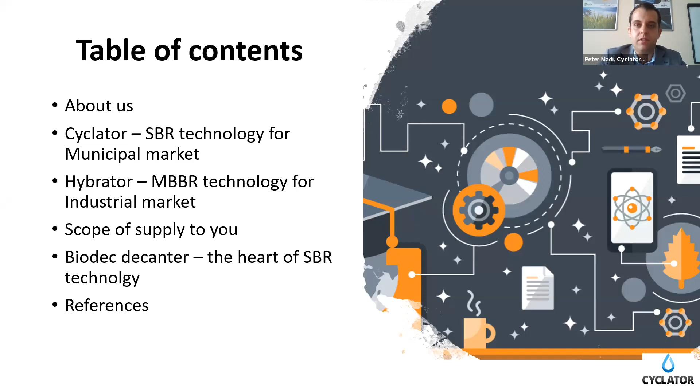And then I would like to also show you our own product. This is the Biodec Decanter, which we call the heart of the SBR technology. And I would like to also show you some references and some case stories. So first of all, some words about our company.

We have more than 23 years experience in the wastewater treatment industry. Approximately now I can tell you that we have almost 350 projects from the past. And as you can see, our revenue and headcount is also growing year by year, and we are investing quite a lot in R&D.

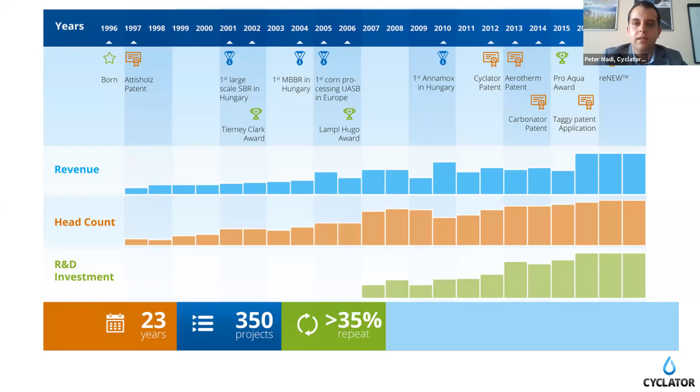Now we have 50 colleagues in our office. And maybe it's interesting to share with you that our founder and CEO is Sunny Bashin, who originally comes from India.

We have a nice workshop with 700 square meters. Here we make the electrical cabinets and some special products that I want to show you in the upcoming slides. We have the office for the 50 colleagues, and we also have a lab where we can make measurements for the projects. So for sure, if there is a wastewater treatment project, we would like to see the influent parameters, but many times we also make our own measurements to check the quality of the wastewater. And here is where we do our R&D.

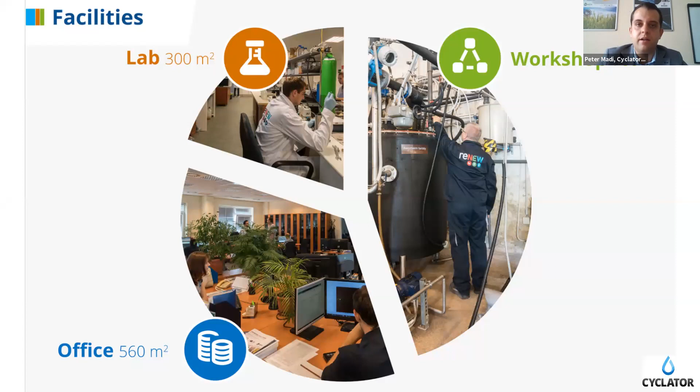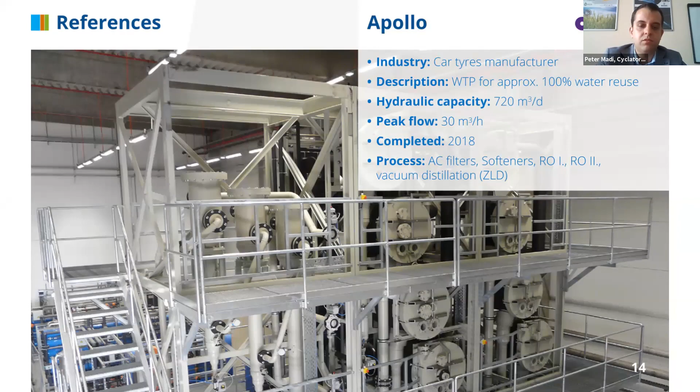Just briefly, how we are looking into the future and what kind of other products we also have. This is the ZLD product. It's still, I would say, in some test phase. It's already working, and we will have this product very soon because now we have 2 test references in Hungary. This is Apollo, the car tire manufacturer. There's a factory in Hungary where we successfully installed our ZLD solution about 6 months ago. We are really proud to show you that we are one of the very first who has ever made

cleaner water from the wastewater. We have a complex solution - I don't want to go into the details, but we make cleaner water from the wastewater in Budapest, and you can see our products also. It can be in Hungary, Austria, and Germany, and sooner or later we'd like to take it to the US or United Kingdom also. We are really proud of it. For this, I just wanted to show you that we are investing a lot in R&D, and we are not just offering old products and solutions - we are looking into the future.

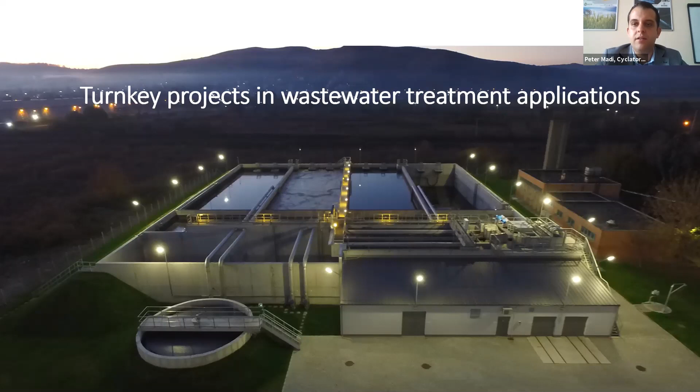But let's jump into the main topic about wastewater treatment applications. This is a nice reference photo from one of our main references where we offer turnkey projects. What you have to know is that in the region, in Hungary, we offer design work also, and sometimes we make the construction work also. So for example, in this case we had a turnkey project, and you can also see 2 decanters in each tank, which is also designed and manufactured by us. What we can offer to India alongside Mahesh and Clean Tech is the design part and supplying the equipment.

How it looks like - the Cyclator SBR technology, which is mainly offered for municipal applications. This is a general concept. We have the select zone and the react zone, as in all general SBR tanks. What is a main feature of the Cyclator? Why is it unique? We have continuous influent - there you can see a feed forward pump. This is a unique patent, nobody else uses it. It was designed by our R&D team. Why is it good? We feed the react zone from the select zone with fresh wastewater, which helps the biological phosphorus removal, and that's the reason we can decrease the amount of chemicals added, so we can save some money on it also.

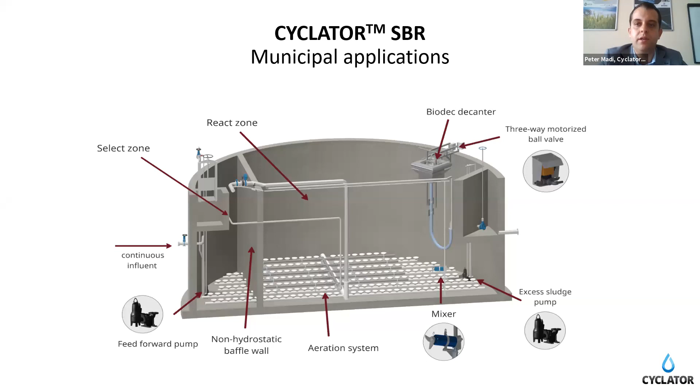For sure, we have an aeration system every time. Generally, we offer the 9-inch membrane diffuser system. If we have denitrification, we also have the mixer. We have an excess sludge pump, and we have the Biodec Decanter. This is self-designed, in-house design, and we manufacture it in Hungary, with more than 100 references. The reason we like to give it as a big package is that this is how we can give you a guarantee. If you give us the influent parameters and requirements, we give you the design, we can construct it also, and we supply the heart of the SBR technology - the Biodec Decanter, with the monitoring and control system, which is made in-house.

Generally, I want to show you how the cycle looks like. We have 96 minutes of aeration, which is followed by the mixing part, and then we have the settling and decanting time. We always check the parameters and the requirements, so that's how we adjust how many cycles we need and how much time we need for each cycle. But it's interesting because it's quite unique - this is the FF cycle, where we use the feed forward pump for the biological phosphorus removal, which we use at the settling and decantation stage.

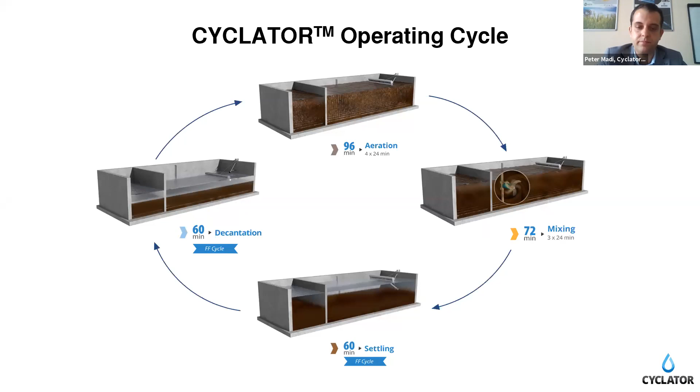Some data from a Hungarian project we had some years ago. Just wanted to show you what we can achieve with our technology, our Cyclator SBR technology. It was a municipal application with a smaller wastewater treatment plant, where we had 600 BOD with 1,200 COD, and you can see the effluent parameters also. And for sure, we made also the biological phosphor removal, as we use the feed-forward technology.

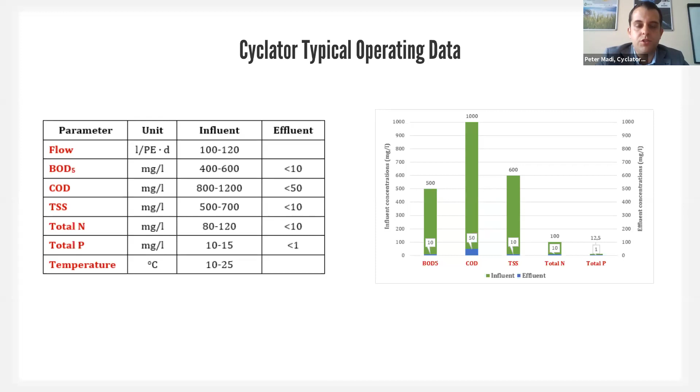For sure, it always depends on adjusting to the characteristic of the wastewater. But I think it's good to show you what we can achieve for a general wastewater. I guess everybody is interested: why should I buy or design a Cyclator and not a conventional wastewater treatment plant?

It's real parameters and data from a case story from Hungary, where you can see that the energy consumption can be reduced. Why? Because we use less mixers and less pumps, for instance. That's the first thing. Sure, we can use much less chemicals. The chemical consumption can be reduced dramatically. Why? Because we have this feed-forward technology, which is installed in the Cyclator, as I showed you.

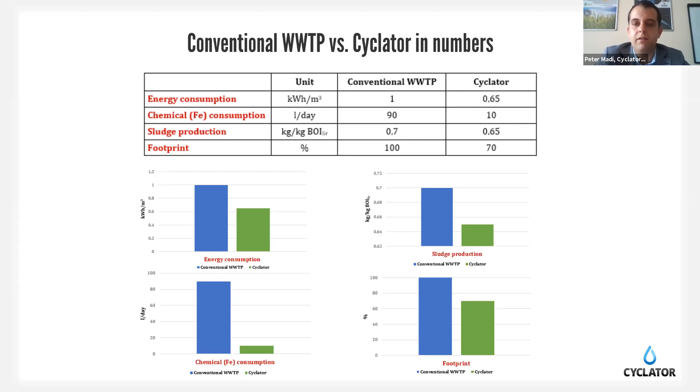The sludge production will also decrease a bit, but the main thing is the footprint will be decreased, approximately 30%, because we don't need to have a post-clarifier. That can be a huge saving also for the construction company. If we see the energy and chemical consumption, it will be a big benefit for the end users.

If you are speaking about the CapEx and OpEx, as I mentioned we can have a smaller footprint, and the construction is quite simple. We give you a kind of ready-to-build design, as we call it in Hungary. So it's really easy to install if everything is set.

About the technology, just confirming again, one of the main features is the continuous influent. We have the complete biological nutrient removal, and we have the feed-forward pump cycle concept, which helps us with chemical savings by integrated phosphor removal. We also have energy savings by using less mixers and pumps.

I think it's quite important that we always design for the peak flow, which we generally design up to 5 times more than the average flow, if anything can happen. Nowadays, like in Hungary and in Europe, we have a lot of rainy days and floods, and that's the reason why we like to stay on the safe side.

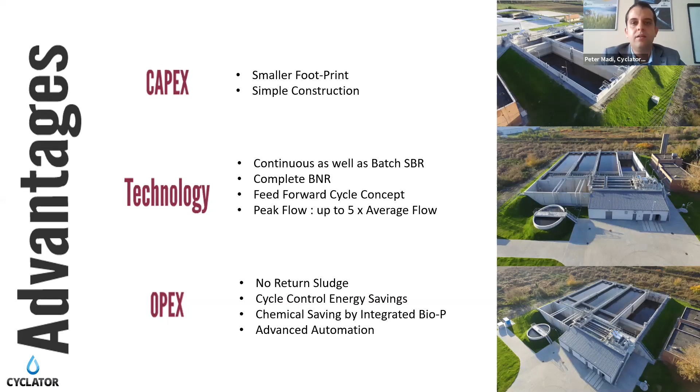You can see on the picture one case story. This is a Hungarian wastewater treatment project. You can see our Biodec Decanter. This is a fixed type decanter, and 9-inch membranes also.

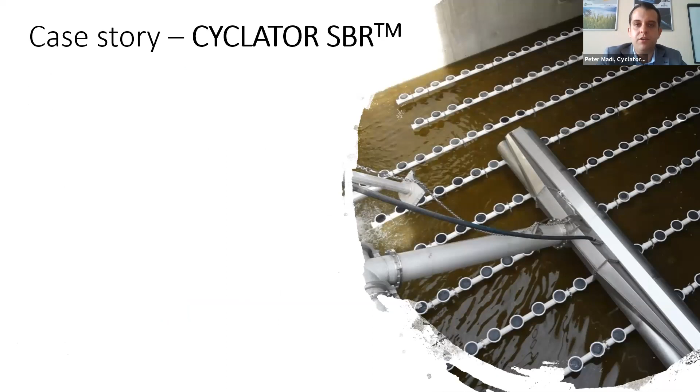I wanted to show you that it was a European Union project, and generally in Hungary there are 2 key players: one is the end user, and the second is the construction company. The construction company, as always, wanted a low investment cost. The end user, the waterworks, wanted a continuous influent treatment plant, and also wanted biological phosphor removal. I think you can see from the past slides that we were the key winners, the key players, since we have the continuous influent.

We could give, with our biological phosphor removal, the low investment costs also, as they didn't need to build a clarifier, which was also a big advantage for the construction company, since we have our own decanters, and we could guarantee everything. So we got the influent and effluent parameters, and we could tell our customer that it's a project which will be made by us using our own decanters. We make the design and we can give you our guarantee, because everything is in one hand, in one package.

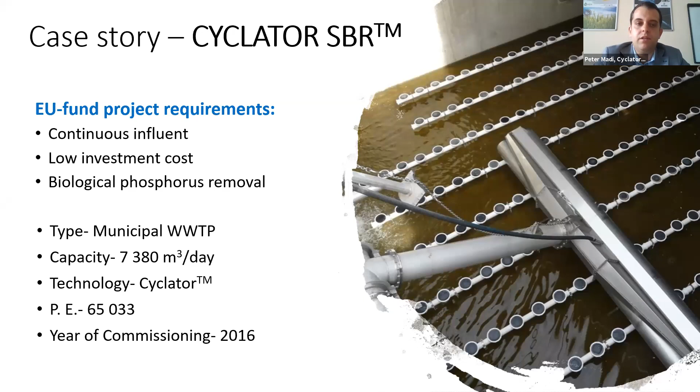Just some information about the project. In Hungary, we can say it's a bigger project, at 7,380 cubic meters per day. In Hungary that's big, but we don't have any limitation for the Cyclator, so we can go much bigger. The wastewater treatment plant was built in 2016, and it's operating without any problem, without any maintenance.

I want to show you a video about our Cyclator technology.

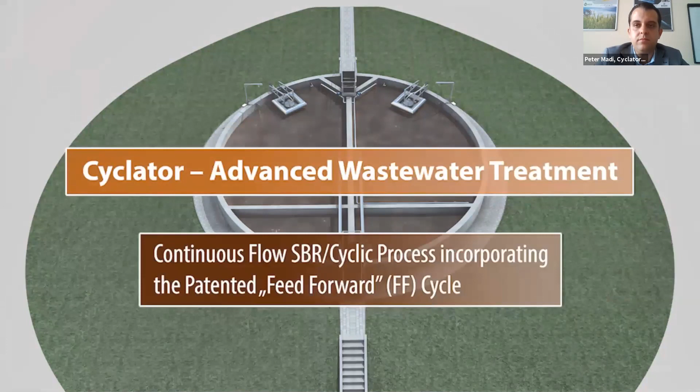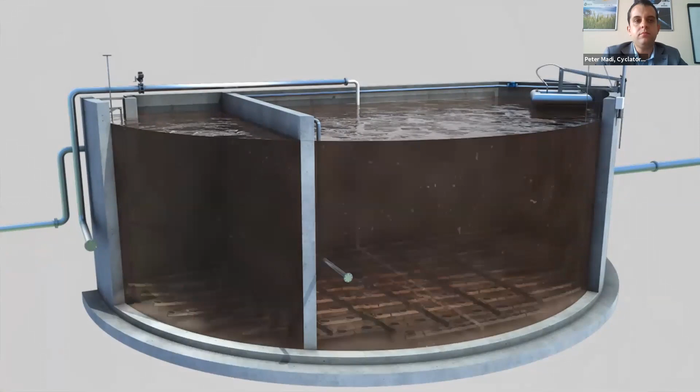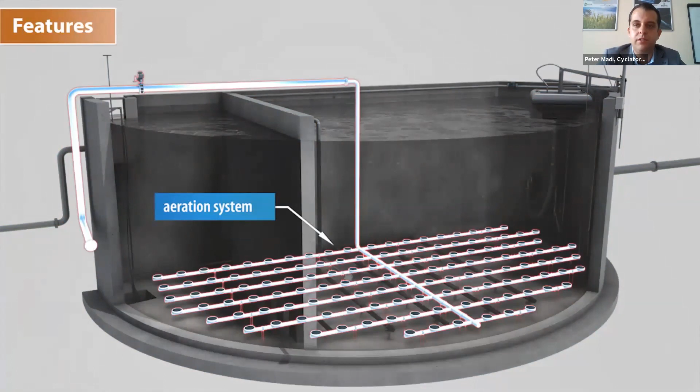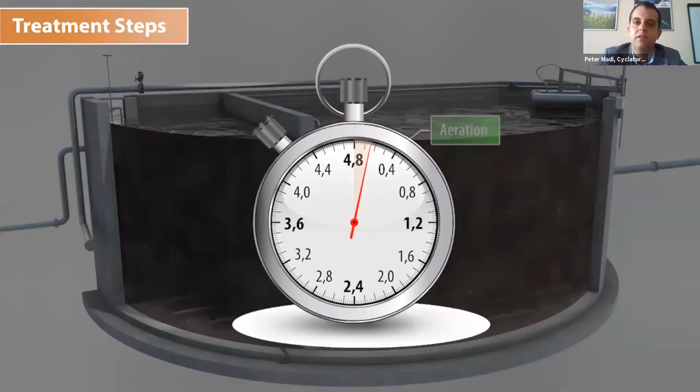So we have the React zone and the Select zone also. Here you can see our feed forward pump and the aeration system, which we generally use the 9-inch membrane system. We have the pumps and the mixers, and all sorts of manufactured and designed Bioduct decanters. Now you can see a floating version.

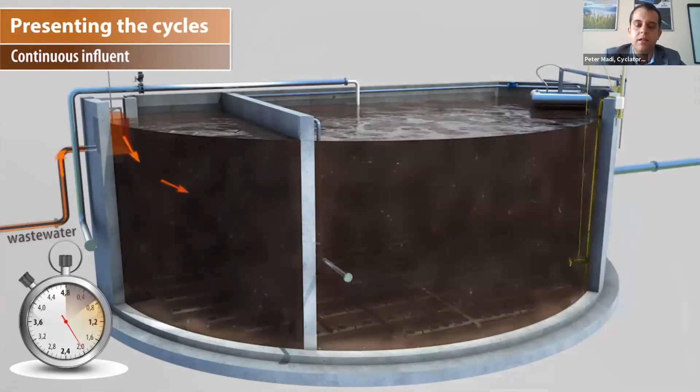We have the continuous influent, which is a big feature of our technology. Every time when we make a design, we always give you the recommendation, what kind of products, what type we suggest, but sure, you can buy or you can choose your own one. But we give you a whole package for the design.

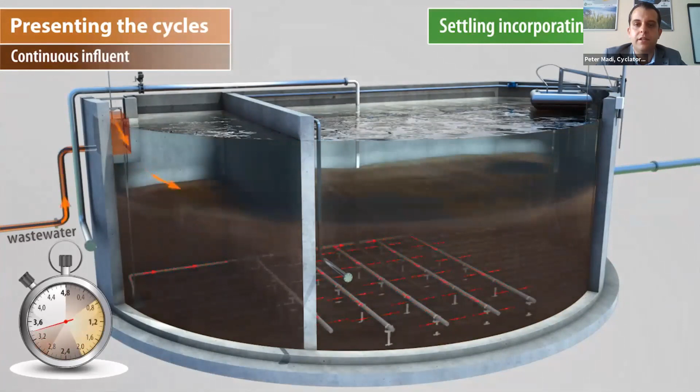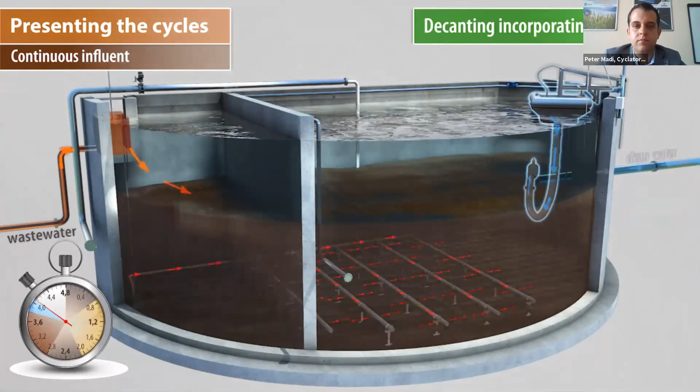Now you can see how the feed-forward pump starts to work and gives fresh wastewater to the react zone, which helps the biological phosphor removal. During that time, the decanting starts.

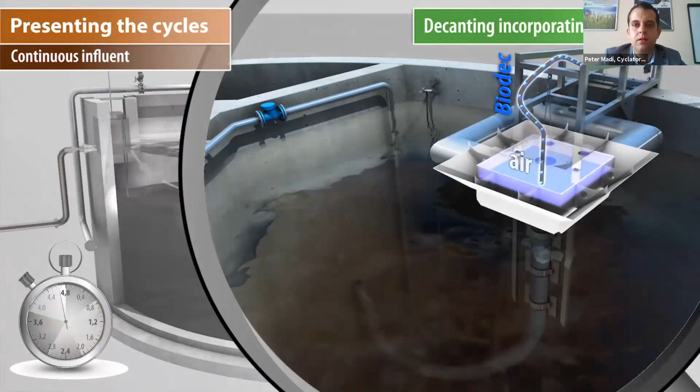I will tell you more about our Biodec decanter, but you can see that we don't use any external compressor. We use the existing blowers, because if you have a wastewater treatment plant, you should have a blower. So it will help you to save some money, because we can use the existing air what we have on the wastewater treatment plant.

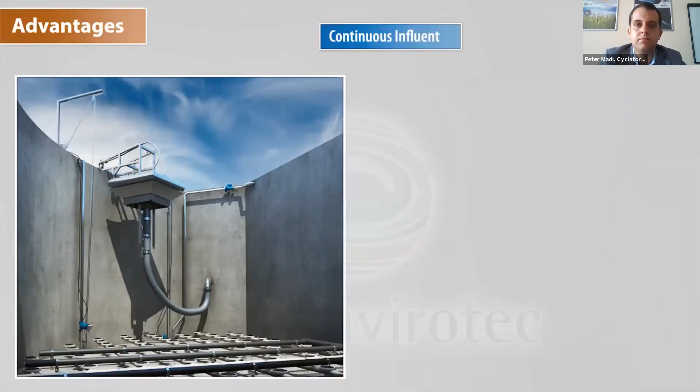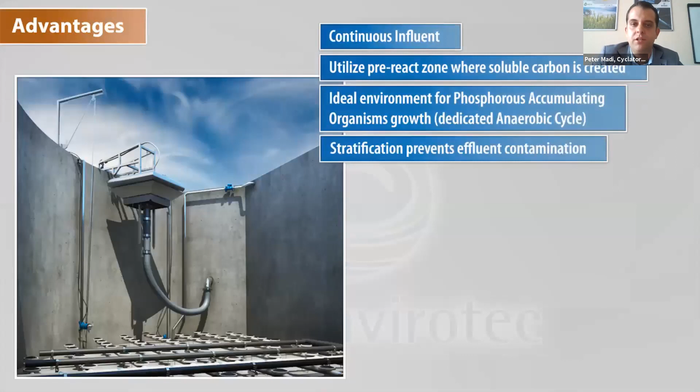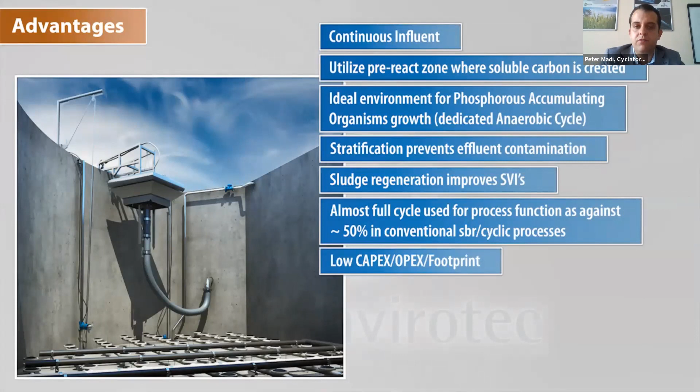Summarizing the main features of the Cyclator technology: continuous influent. We have the phosphorus biological removal because of the feed-forward technology we have invented. We can improve the sludge regeneration. We have kind of low capex, opex, and less footprint we need. And we have a unique Biodec decanter also.

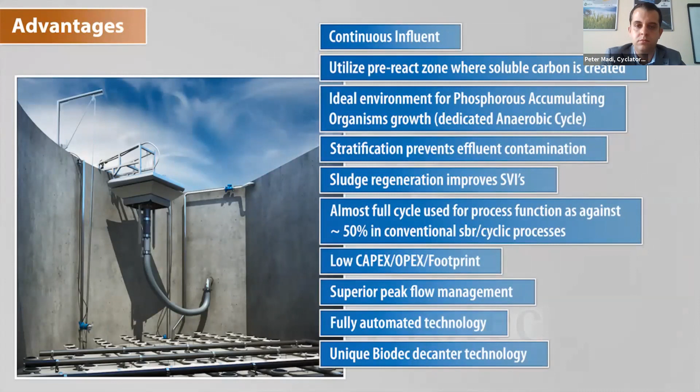Let's continue with the Hybrator, which is the MBBR technology, generally offered for industrial applications. Special media is applied. We start always our calculation with 33% fill fraction rate.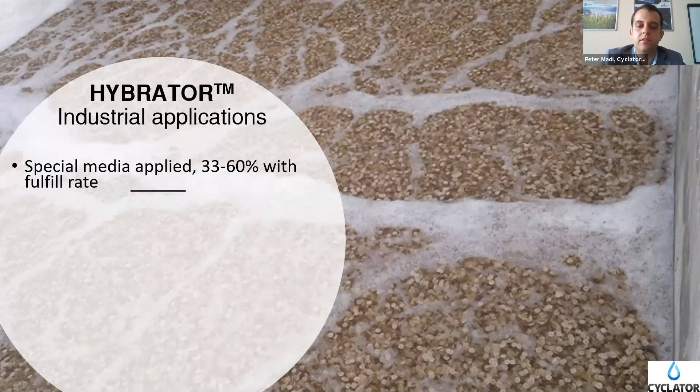I don't know if some of you is not familiar with the technology. I show you a picture how it looks like, this plastic media. There are many types on the market, and this is one of them. After we add this special media into the tank, then the biofilm starts to grow on it, and then it starts to operate.

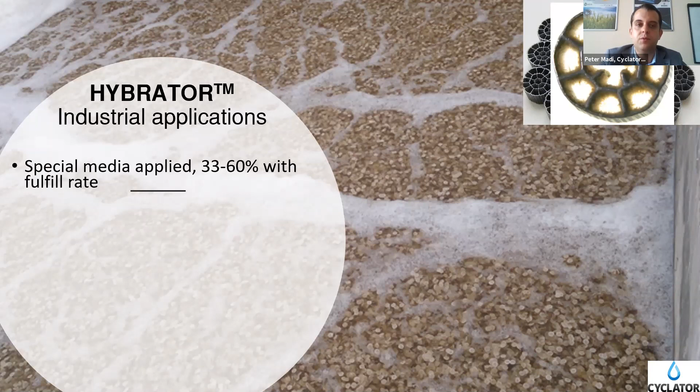So some features about how it looks like and what can we achieve with the Hybrator. We can increase the treatment capacity, it also improves the settling characteristic. Operation is at higher suspended biomass. Also, we will have lower sludge production, and we have less area required.

Some key information, key features. With this special media, we'll have a fixed film system, which is much more stable due to the establishment of fairly advanced biological consortiums. We have improved nitrification, because nitrifiers are slow growers, so providing a fixed film surface allows them a chance to grow in a quantity enough to greatly impact the nitrification.

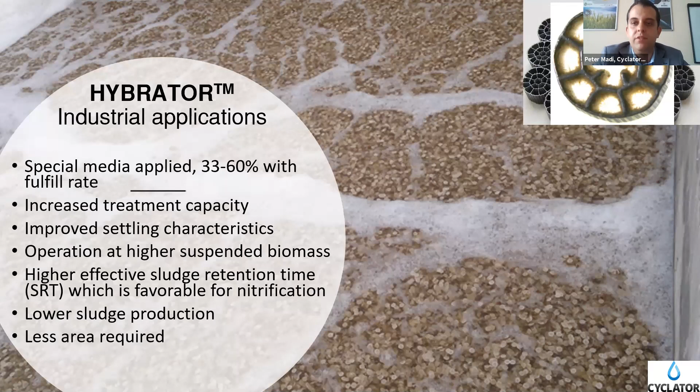We also have to know that suspended growth nitrification is harder because the nitrifiers can wash out from the system. It's also good to know that the technology allows us to treat a much stronger waste in a smaller volume. And as I mentioned, we can add more media. Generally, we start the calculation with 33%, but if it's required later on, you can add more.

It looks like a case story. It describes the technology the best. I guess you know also the Suzuki car factory we also have in Hungary.

What the Suzuki car factory wanted from us was to have stability also under large load variations, because I think every factory has its own season. So sometimes the production goes up and sometimes goes down. That's the reason why they wanted to have a stable wastewater treatment solution.

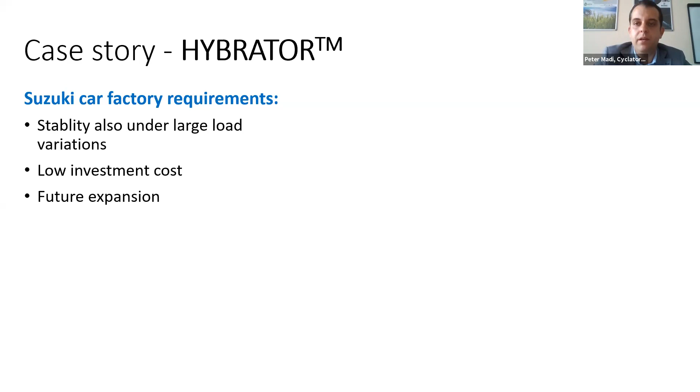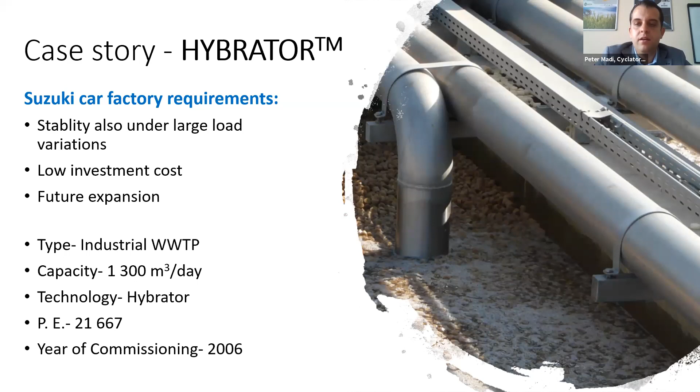As always, like in municipal and industrial application, they wanted to have a low investment cost. And the key message from the factory to us was that there is the possibility to have a future expansion - they don't want to invest more later on. That's why the MBBR technology is good: we can add more media to the tank, and then it can handle a bigger amount of wastewater. It was 1,300 cubic meters per day, and it's been working for more than 15 years.

So what we can give you, alongside with Transcend Cleantech, who is our exclusive partner in India: first of all, we give you a basic design and engineering package, whether it's a Hybrator technology or a cyclator. We always ask for the influent and effluent parameters, and we calculate what kind of technology we should give you. First we make a preliminary design where we tell the customer the main dimensions, what kind of equipment we should use, and give a preliminary energy consumption and chemical dosage needed to reach the effluent parameters.

After that, we can give you the final design along with the engineering package. As I mentioned, it's a kind of ready-to-build design, so it's very simple to build afterward because we give you everything in one package.

I think it's really important for our end users and construction companies that we are the ones who also supply the decanters, because it's the key part of the technology. This is how we can guarantee you will achieve the effluent parameters, if you follow our design recommendations and use our decanters. Then we give you everything in one package.

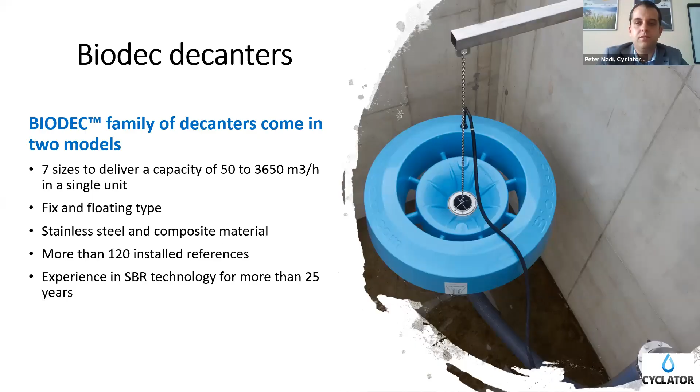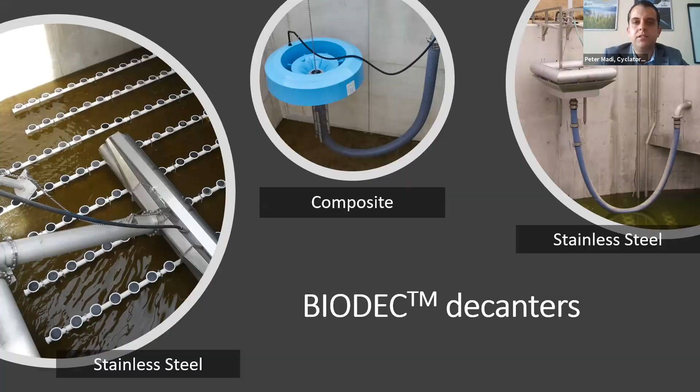As I mentioned, we have the stainless version. Now you can see the stainless steel Biodec 200, floating type. We have the fixed type, which we also have in India, I'll show you. And we have the new version, the composite Biodec C. Just briefly, some features about this Biodec C.

This is our main product now for the SBR technology. Because of its composite material, it's very lightweight, so it's easy to install. Many times we got the question, what happens if there's no electricity? The answer is there's a built-in auto-stop mechanism, so the emergency overflow function will start. Both the fixed and floating versions can operate on process air, so you don't need to buy a compressor for it. I'll show you nice pictures about the scum and solid exclusion, which is very important in these technologies.

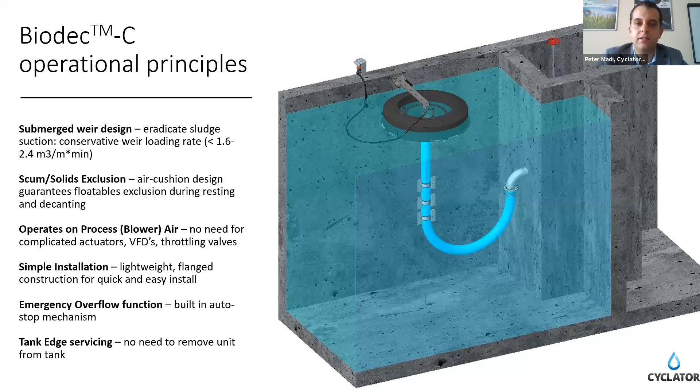Some other features: because the body is composite and not stainless steel, it's totally corrosion resistant, doesn't have any moving parts, which makes it absolutely maintenance free. Because of the composite material, it's easy to install and very lightweight. Another feature is that you can adjust the discharge flow. For this type of decanter, for each unit, you can adjust between 50 and 400 cubic meters per hour as you wish.

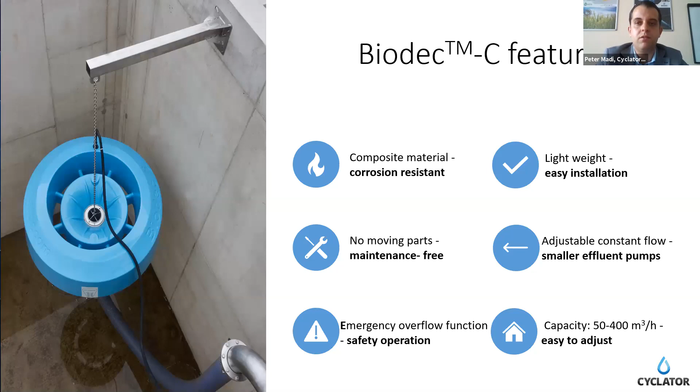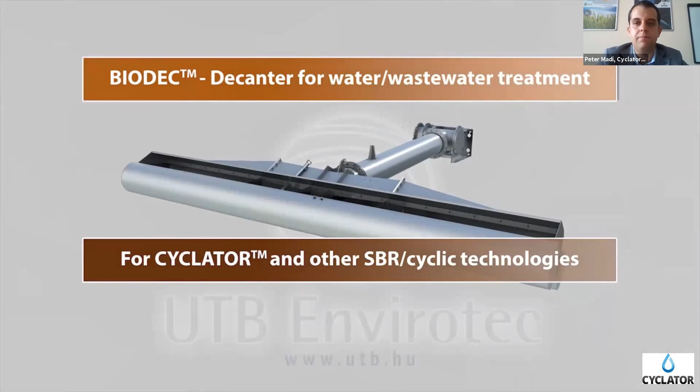Just a video about our decanters. This is the fixed type made of stainless steel, made of 2 or 3 kinds of materials. This is the type we also have in India, we had 3 projects with it.

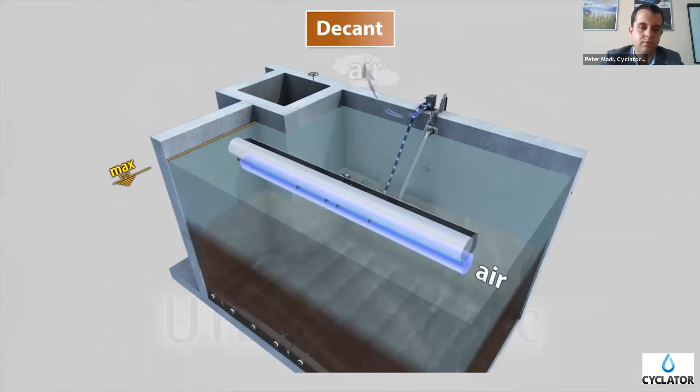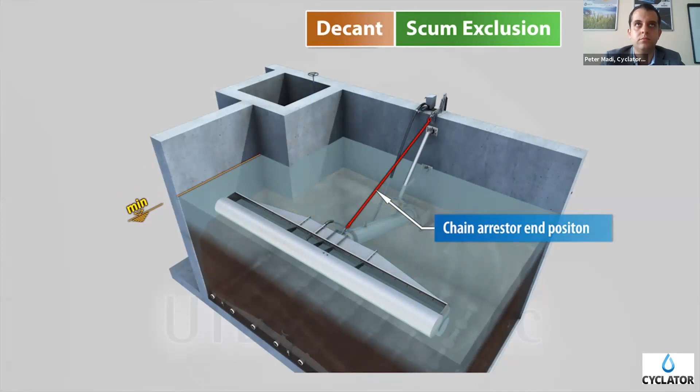As mentioned, we don't need to use an external compressor because we can use the blower.

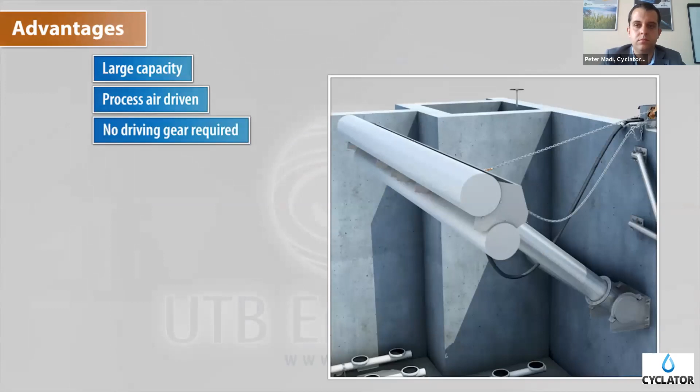One nice case story, one of my favorites, about decanters. There was a huge problem in a Hungarian wastewater treatment plant where the end user, the water works, asked for help from everybody in the market, but we could solve it. The problem was a large amount of scum and foam on the surface, causing operational problems. That was the biggest problem.

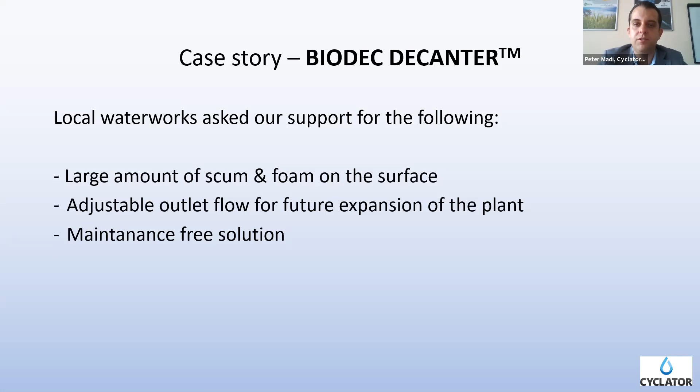Because they wanted to change the existing decanters, we offered a maintenance-free solution, since there's no moving part in our technology. We told the end user there's a feature where they can adjust the outlet flow, as I mentioned before, and I want to show you how it looks.

We had 45 projects in Hungary where we sold our decanters, in some cases 8 pieces each. As I mentioned, we also had 3 projects in India in recent years, from 1 to 26 MLD. We sold fixed type stainless steel decanters to Bundi, Jaipur and Jhansi. This was our project reference for our decanters.

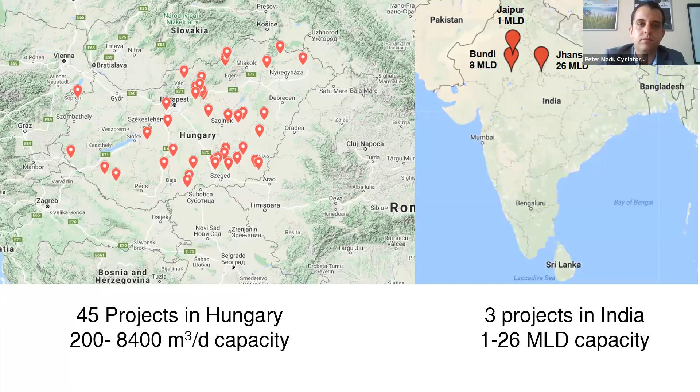I wanted to show you two references from the industry. This was KALL Ingredients, a food industry project. The biggest task was how we can solve the big COD load, and this is how we managed to solve it. Either you can see or you can read our technology.

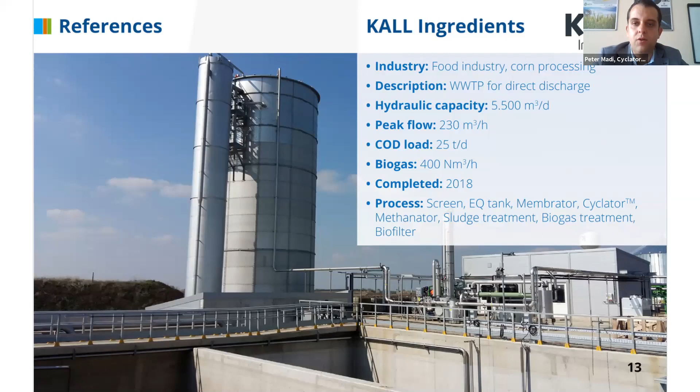It's interesting that we don't always want to offer the hybrid or MBBR technology. For instance, now we offer the Cyclator. We always check the parameters, the influent and the required effluent parameters, and we design the best solution accordingly. So we don't just want to sell Cyclator or hybrid technology, we want to give the solution.